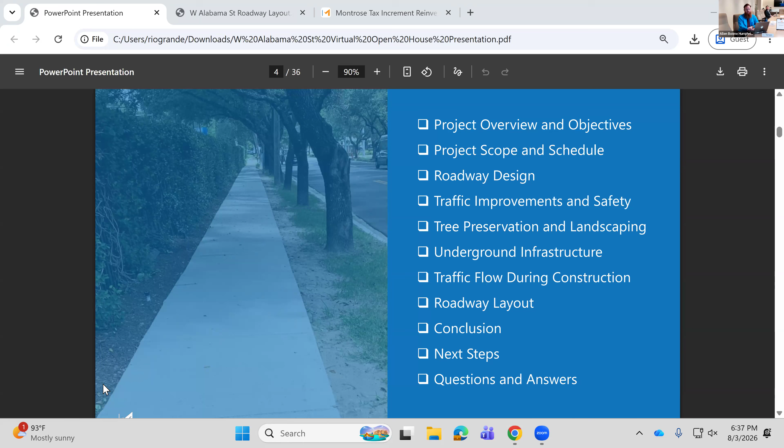These professionals can answer questions that you submit today during the Q&A session. Tonight we are going over the following topics: project overview and objectives, the project scope and schedule, the roadway design, traffic improvements and safety, tree preservation and landscaping, underground infrastructure, traffic flow during construction, the roadway layouts, with a conclusion, next steps, and questions and answers.

First, we are going over the project overview and objectives. Now, this project from Shepherd to Spur 527 is the middle section of a larger project.

The key goal for the City of Houston was to have consistency between all three sections. The City of Houston drove major decisions such as lane configuration and key safety design choices on all three projects for consistency. Now we are the middle segment, and so to the west is the Upper Kirby segment of West Alabama, and you can go to the Upper Kirby website for information about their project. To the east of us is the Midtown section of the West Alabama project.

The West Alabama Street project is a full roadway reconstruction project that is 1.6 miles long. The construction cost will be approximately $30 million. It is currently in the design phase.

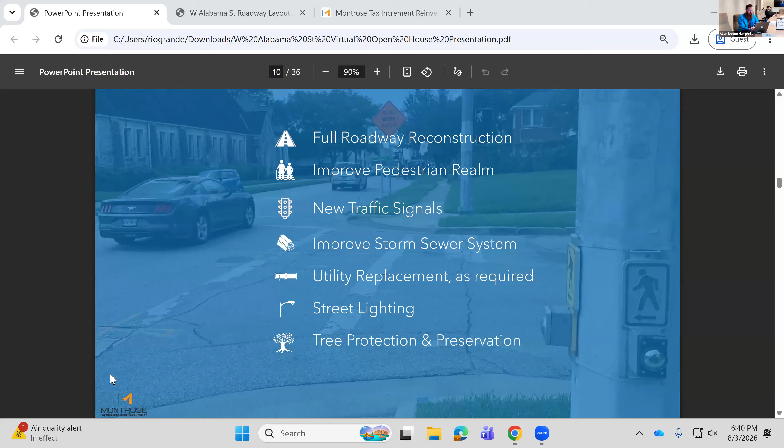The project schedule for West Alabama Street is currently in the design phase, which will continue through late 2026, with construction beginning in early 2027, lasting approximately 2 years to completion in early 2029. Just be aware that this timeline is subject to change.

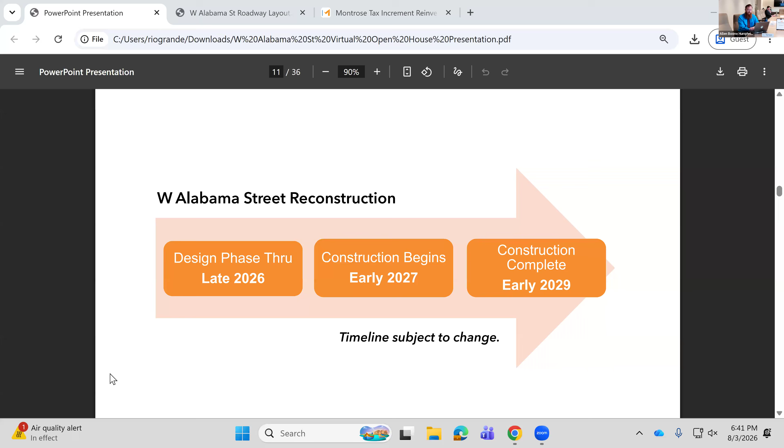Now for the roadway design, let's compare existing to proposed conditions. Existing conditions, shown in the photograph at top left, consist of poor to satisfactory asphalt pavement, one lane in each direction, with a poorly marked center two-way left turn lane. This lane used to accommodate the former contraflow lane, and today, now that it's no longer a contraflow lane, it operates more like a two-way left turn lane without the proper markings.

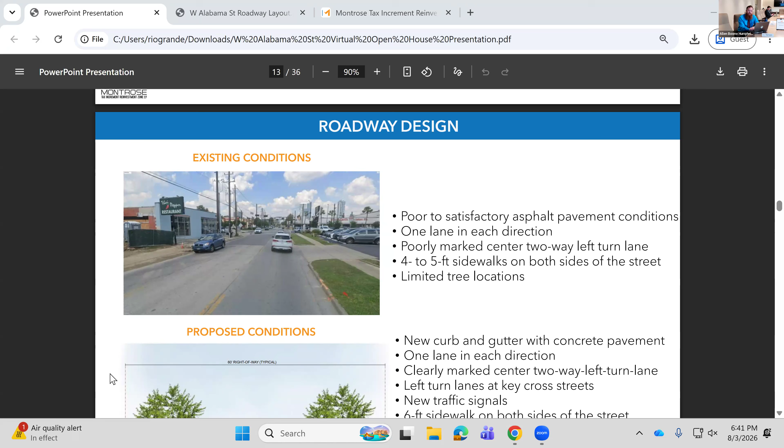The sidewalks are 4 to 5 feet in width on both sides of the street, and tree locations along the roadway are fairly limited. Several of the blocks have no trees at all.

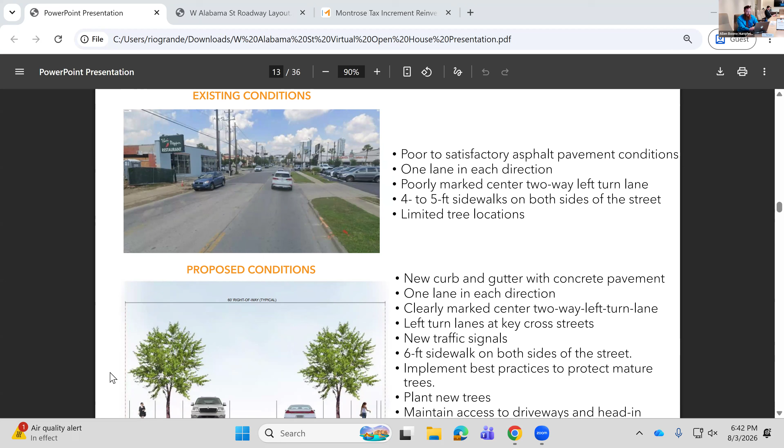Proposed conditions will have a new curb and gutter with concrete pavement roadway, one lane in each direction, a clearly marked center two-way left turn lane, left turn lanes at key cross streets, new traffic signals, and 6-foot sidewalks on both sides of the street, as shown in the typical section at bottom left.

Throughout the project, we will be implementing best practices to protect mature trees. New trees will be planted where possible, and we will maintain access to driveways and head-in parking.

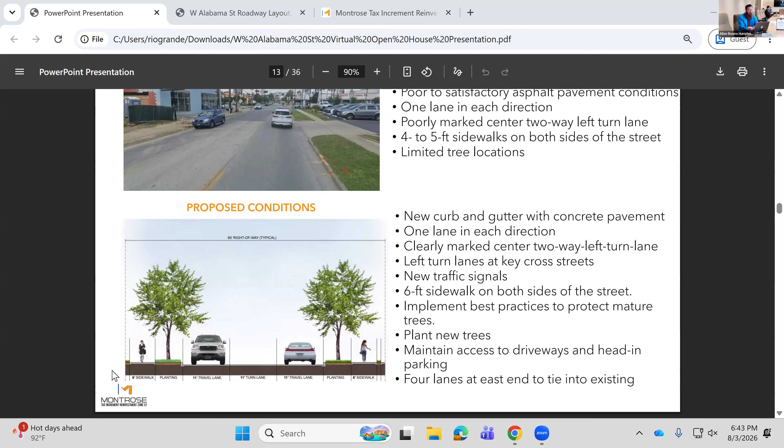One section of the project, in both existing and proposed conditions, does have 4 lanes, at the very eastern end near Spur 527. Overall, the existing lane size is closer to 12 feet, whereas our proposed lane size is 11 feet.

Now for traffic improvements and safety, the traffic signal improvements consist of 6 reconstructed traffic signals and 1 new traffic signal at Hazard Street.

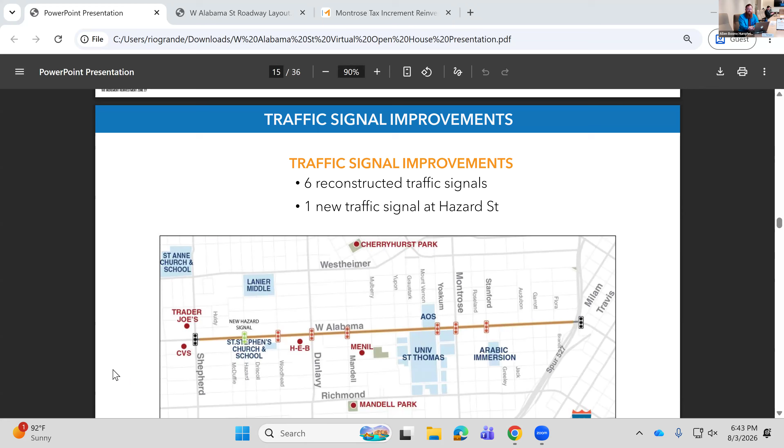If you look at the image below, there's a legend at the bottom right of the map. The red traffic signals represent the signals being reconstructed, at Woodhead, Dunlavy, Mandell, Yoakum, Montrose, and Stanford. There's a new traffic signal at Hazard Street towards the western end of the project, and the two signals at the westernmost and easternmost parts of the project, at Shepherd and Milam, will remain.

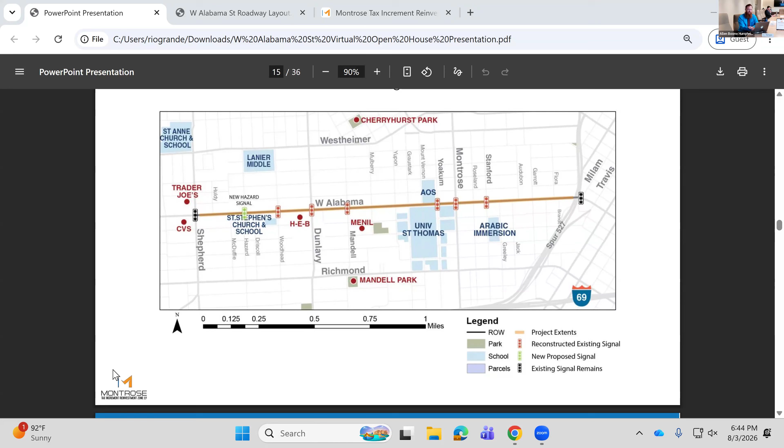Now I'd like to talk a little about intersection safety for pedestrians. At these signalized intersections, there are pedestrian signals, as you can see at the top left, and audible pedestrian signals for those with impaired vision. No right turn on red signs will be posted at all signalized intersections to enhance safety within the intersection.

Lastly, leading pedestrian intervals are being recommended to the City of Houston at all signalized intersections. The Federal Highway Administration notes safety benefits of a 13% reduction in pedestrian-vehicle crashes at intersections with leading pedestrian intervals. We recently did this on Montrose Boulevard, and we will be working with the City of Houston for these to be approved on West Alabama Street also.

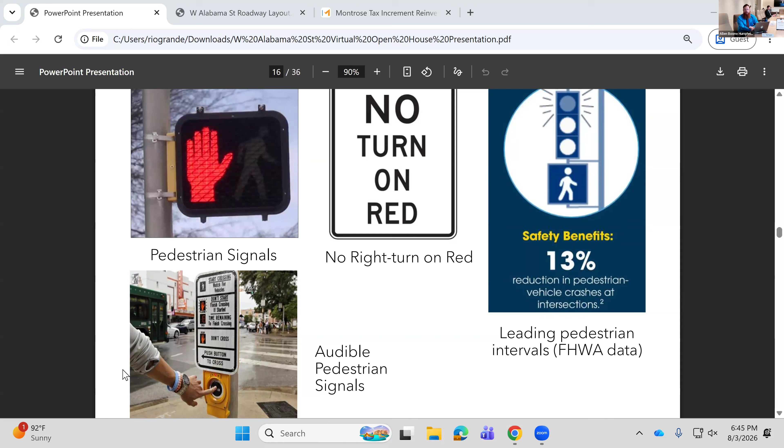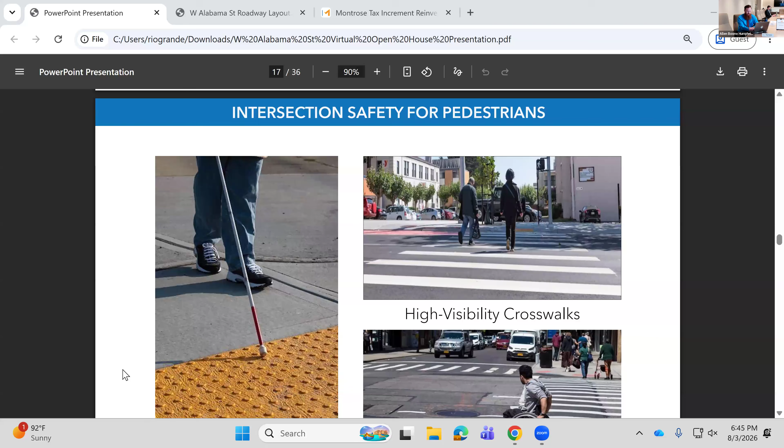Also at intersections, there are high visibility crosswalks, truncated dome warning devices for those with vision impairments, and wheelchair ramps. These are all critical safety improvements at intersections.

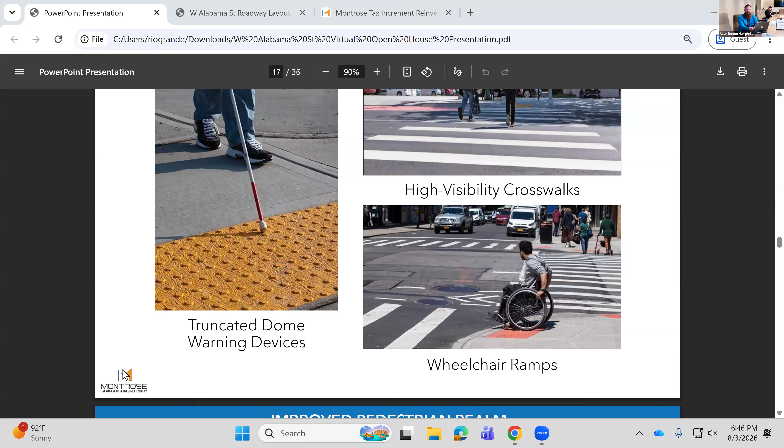Now for an improved pedestrian realm, we're going to compare and contrast the existing with the proposed as we go down this list. In existing conditions, there are 4-foot wide, poor condition or broken sidewalks. In proposed conditions, we are upgrading those by removing the existing sidewalks and replacing them with 6-foot sidewalks where possible.

In existing conditions, there is outdated pedestrian signal infrastructure, whereas in proposed conditions, we are upgrading pedestrian signal infrastructure to city standards. In existing conditions, there are faded or missing crosswalk pavement markings. In proposed conditions, new high visibility crosswalk pavement markings will be installed.

In existing conditions, there are at times inadequate wheelchair ramps. Sometimes they're just too steep. In proposed conditions, we are installing ADA compliant wheelchair ramps.

In existing conditions, there are several sections of the project where safe crossings are too far apart compared to the standard crossing spacing that the City of Houston prescribes, between 500 and 700 feet. In our proposed conditions, we are upgrading the spacing of the crossings to achieve approximately that 500 to 700 foot spacing.

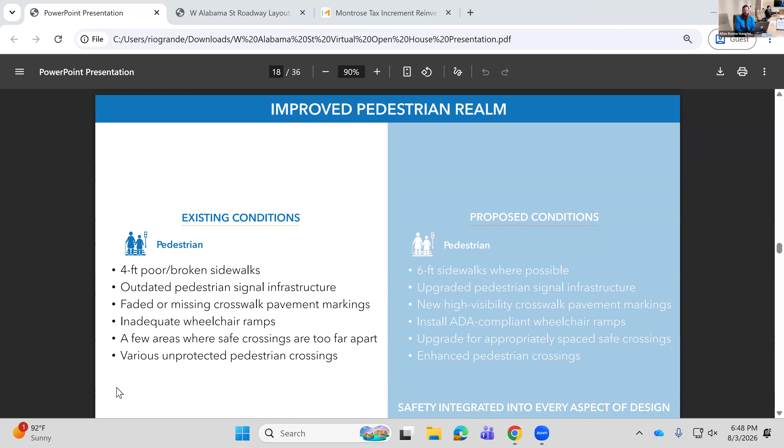Now, when we're designing this pedestrian realm, we are integrating safety into every aspect of our design. That is by far the most important part of this project: to keep all roadway users safe.

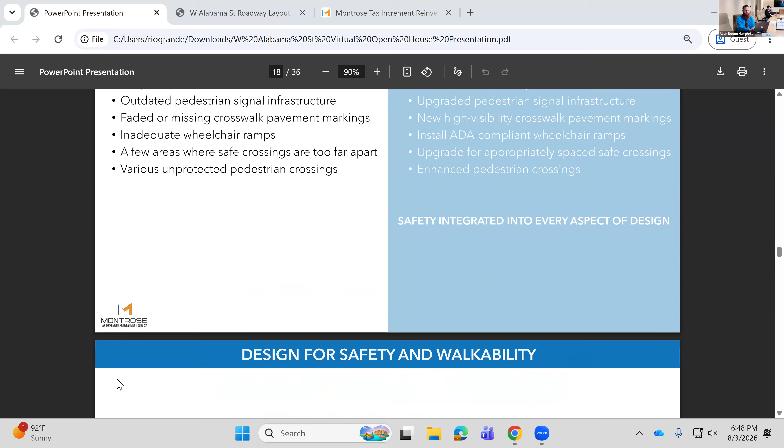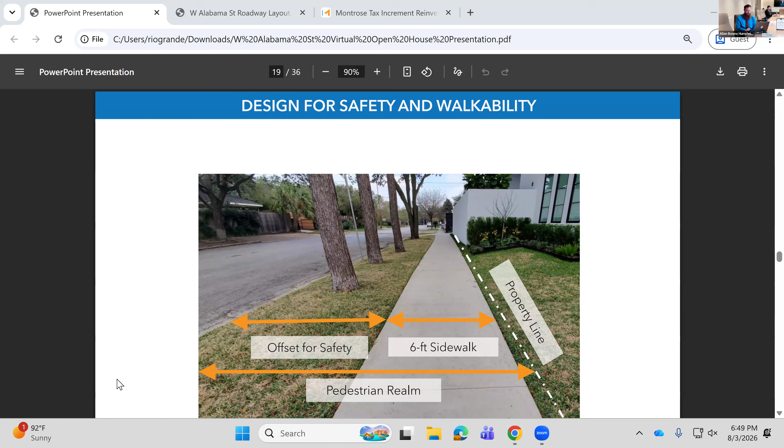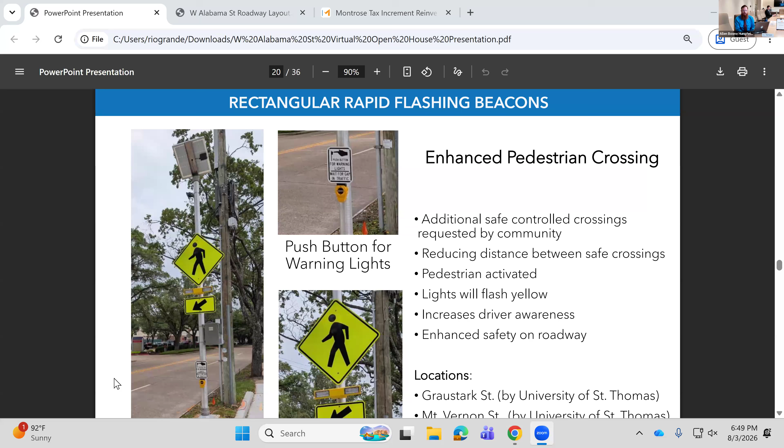Now, back to those enhanced pedestrian crossings. What we are designing on the project as an enhanced crossing is called a rectangular rapid flashing beacon. These additional safe controlled crossings were requested by the community. We've heard at many meetings how people feel unsafe crossing the roadway, and in discussions with the City of Houston, we came up with this improvement, which reduces the distance between safe crossings.

The way it works, if you can see on the left here, there's the image of a rectangular rapid flashing beacon. You have the pedestrian sign, and below that are two flashing yellow lights, below which is the diagonal down arrow, and then the push button. So when a pedestrian wants to cross the road, he should push the button, which starts the warning lights flashing yellow.

As they flash yellow, it brings an increased driver awareness to the presence of the crossing. Once the pedestrian has identified that it is safe to cross, the pedestrian should cross the road on the high visibility crosswalks to the other side. Now, all of this has been proven as an FHWA safety countermeasure for crossing a street.

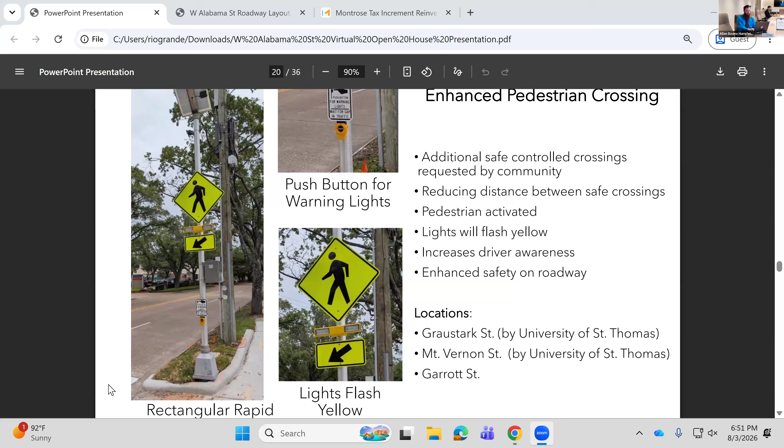Next, now for tree preservation and landscaping. Our design will preserve trees to the maximum extent feasible. To do this, we use a variety of best practices to protect the trees, which can be seen throughout this slide. In some instances, we have zero curb cutback, seen on the top right, where the ground near trees won't be cut behind the back of the existing curb.

Now, in a roadway where everything is shrinking down a little bit, the existing roadway is 35 feet from face of curb to face of curb, whereas the proposed roadway with 3 11-foot lanes is only 33 feet from face of curb to face of curb. Zero curb cutback will be implemented where appropriate and where mature trees exist that are being preserved.

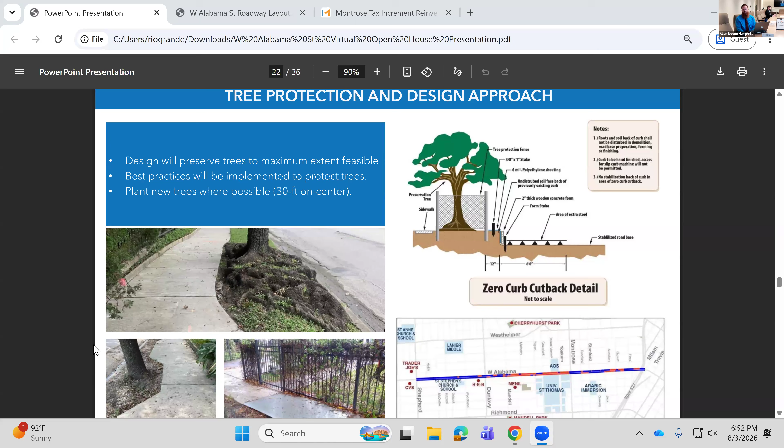Now, in the bottom left, you can see at times where tree protection is designed through the placement of the sidewalk. As you can see with the large roots for this tree in that top image, the sidewalk is not getting any closer to the tree than the existing sidewalk was before it was removed. Also, at times, we can have our full 6 feet of width for the sidewalk getting up close to the tree and then narrow down to 4 feet or 5 feet of width as needed to get past the tree while preserving it.

The third best management practice is the use of a checker plate across uneven root systems. Now, if you look at the bottom right, you'll see an image of a roadway map, and you see both a blue and a reddish orange line.

The blue represents areas where no mature trees are present between the sidewalk and the curb, and this is the predominant condition along the roadway. Whereas the reddish orange line shows the presence of mature trees, which is more closely concentrated around the center of the project. In those red areas, we are designing the preservation of trees to the maximum extent feasible. Whereas in the blue areas, we will be planting new trees where possible at 30 feet on center.

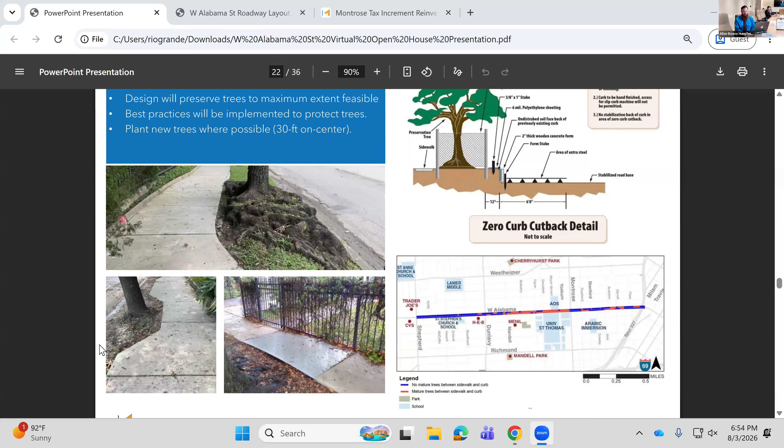An additional tree preservation method has to do with underground infrastructure installation. The traditional repair method involves excavating a trench to install the storm sewer, but with the presence of trees, a trenchless repair method is being utilized to construct water lines. For example, water lines can be bored underneath trees without damaging the root systems, thereby preserving the tree.

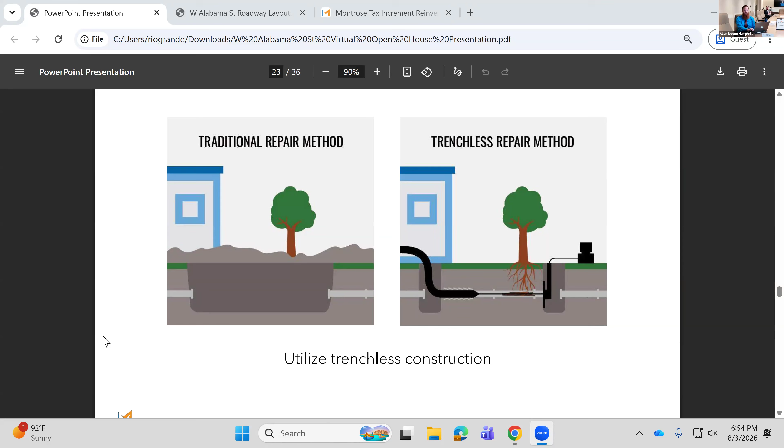Our landscape architect has selected a variety of different types of trees to be planted along the roadway, including a live oak, cedar elm, Drake elm, as well as St. Augustine grass.

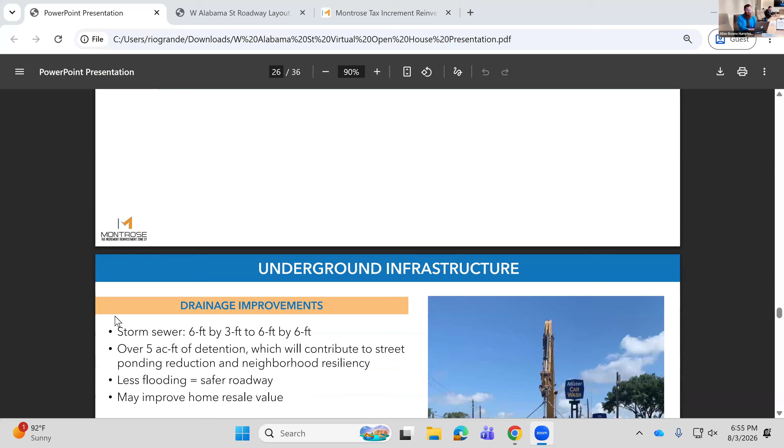The underground infrastructure consists of both drainage, water line, and sanitary sewer improvements. For the drainage, it consists of a storm sewer ranging up to 6x3 to 6x6 box culverts under the roadway. Together, throughout the 1.6 mile corridor, this provides over 5 acre-feet of detention, which will contribute to street ponding reduction and an increase in neighborhood resiliency.

What you'll see after construction is less flooding on the roadway. With less flooding on the roadway, that is a safety improvement for people, whether they're driving in their car or they're walking across the street. It also may improve home resale value.

With water line and sanitary sewer improvements, some of these sanitary sewers and water lines are going to be relocated because we're putting a large storm sewer in conflict with them, so they have to get shifted to somewhere else under the road. But some of them are old, or they're a material that needs to be upgraded to something approved by the city.

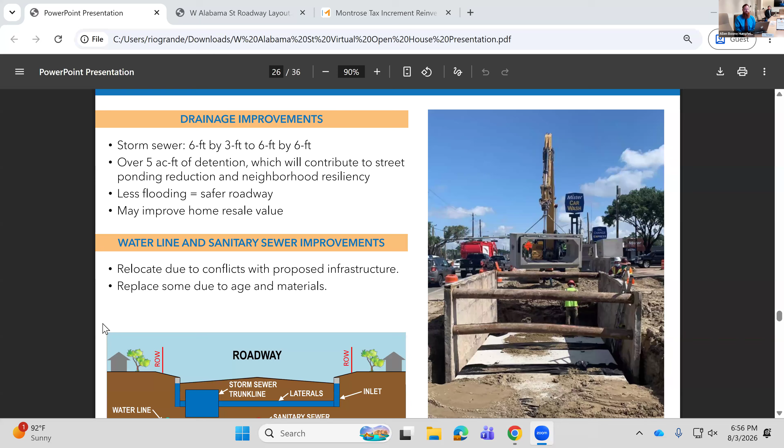Present on this slide, you can see a large storm sewer on the right that is about the same size as what we're installing. It looks closer to the 6x3 size. Whereas on the bottom left of the screen, you can see a cross section under the roadway, where you can see the water line and the sanitary and how they're offset from our proposed storm sewer trunk line and pipes.

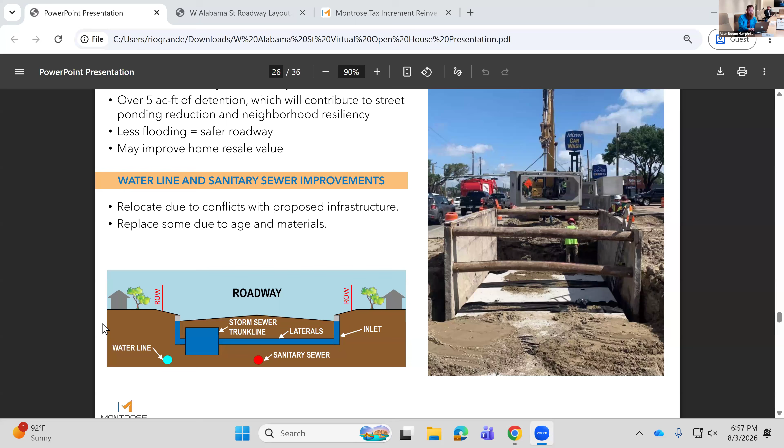Now, with traffic flow during construction, we are going to construct one lane at a time. First is the northern lane, then the middle, then the southern lane. Signage, pavement markings, and traffic devices will direct drivers, with various traffic control devices such as drums and barriers by excavation. All of this is designed to ensure optimal safety on the roadway.

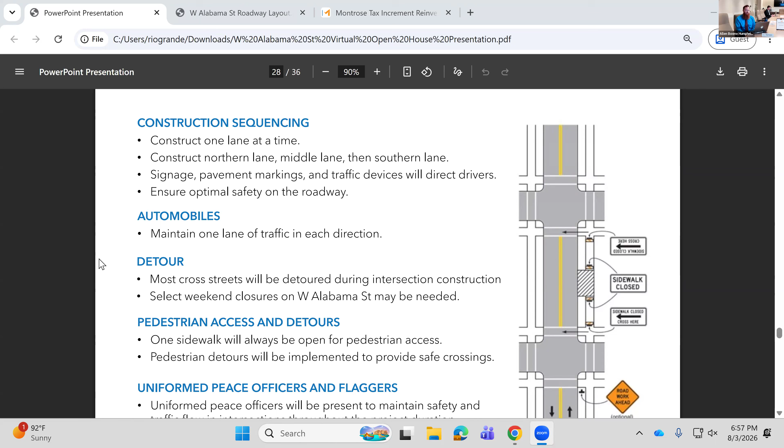For automobiles, one lane will be maintained in each direction, with most of the cross streets being detoured during intersection construction. Select weekend closures on West Alabama Street may be needed at various times.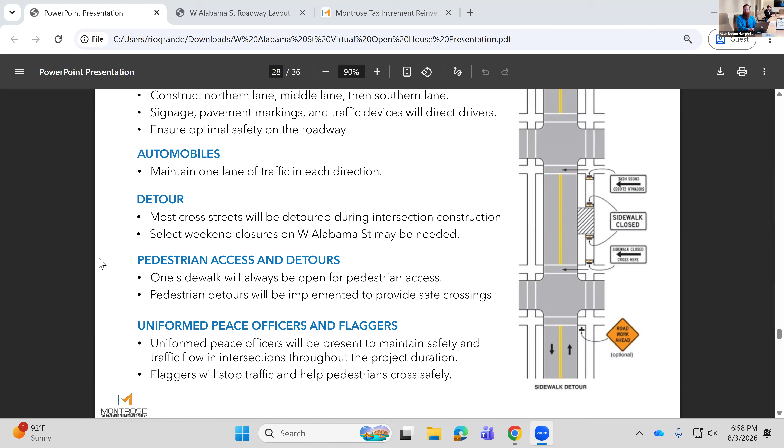For pedestrians, one sidewalk will be open for pedestrian access, while pedestrian detours will be implemented to provide safe crossings, such as you can see on the right side. Within a given block during construction, pedestrians will be helped to cross the road at either intersection. Uniformed peace officers will be present to maintain safety and traffic flow in intersections throughout the project duration, while flaggers will stop traffic and help pedestrians cross safely.

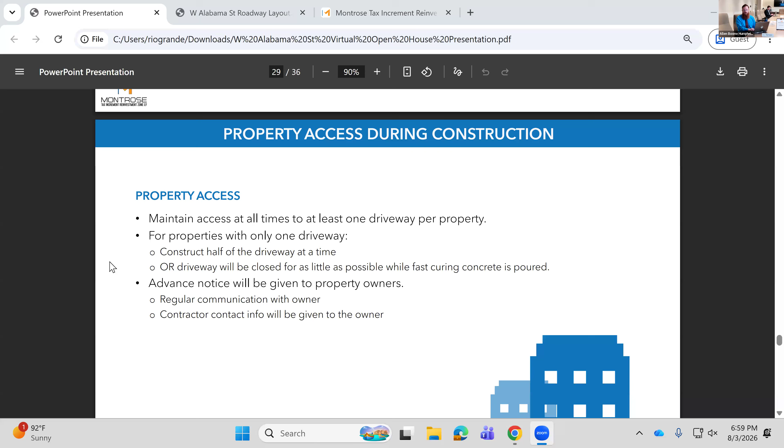Now, property access during construction: we will maintain access at all times to at least one driveway per property. There are properties with only one driveway, and these driveways can be constructed half at a time if they're wide enough, or the driveway will be closed for as little as possible while fast curing concrete is poured. Advance notice will be given before their driveway is closed, with regular communication with the owner. All contractor info will be given to the owner in case they need to be contacted.

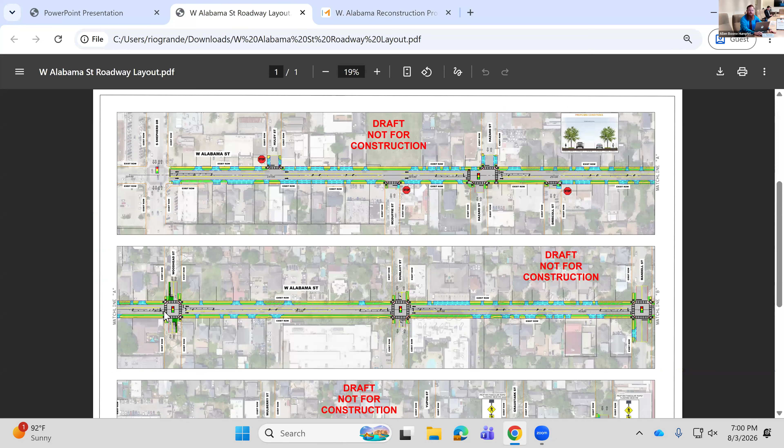Now I want to show you all the roadway layouts, and where you can find it on the website. On the website, montrosehtx.org, if you go to projects, West Alabama Street Reconstruction, you can scroll down, and below the meeting information, you have the presentation and the roadway schematic. This is also where you can submit your comments and questions. Now, first, I'd like to show the legend.

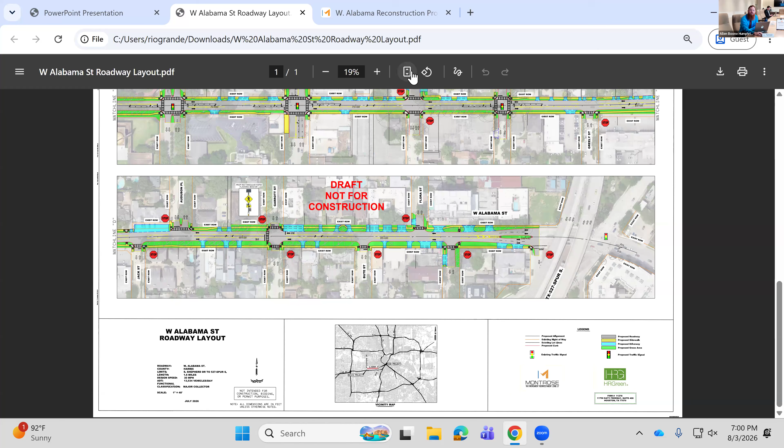In the bottom right, you can see what all the colors mean. Gray is proposed roadway, yellow is sidewalks, blue is driveway, and green are grassy areas, as well as signals, curbs, etc.

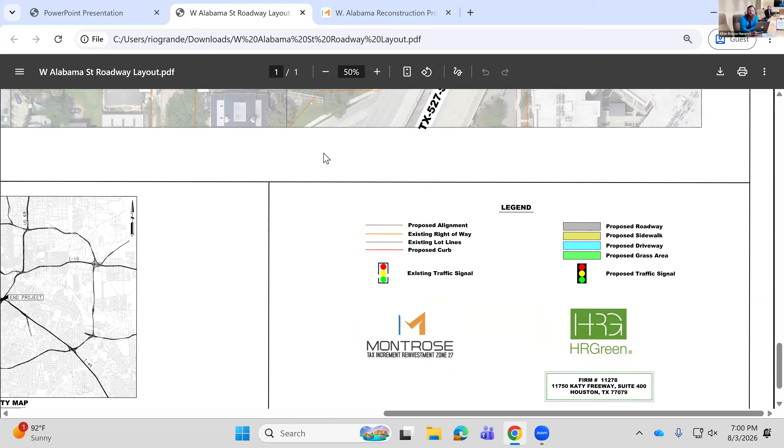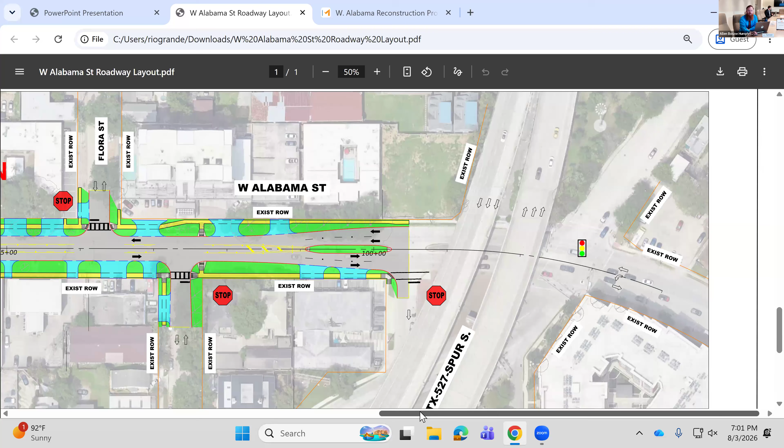I'm just going to go over a sampling of the roadway schematic to make everyone a little bit familiar with it. Here we're on the eastern end of the project where we have the 4-lane section, which transitions to the 3-lane section with 1 lane in each direction and the 2-way left turn lane.

You can see examples of how sidewalks are being routed around existing trees to preserve them, as well as areas where there are wider green areas, such as this wider right-of-way towards the eastern end of the project near Bute.

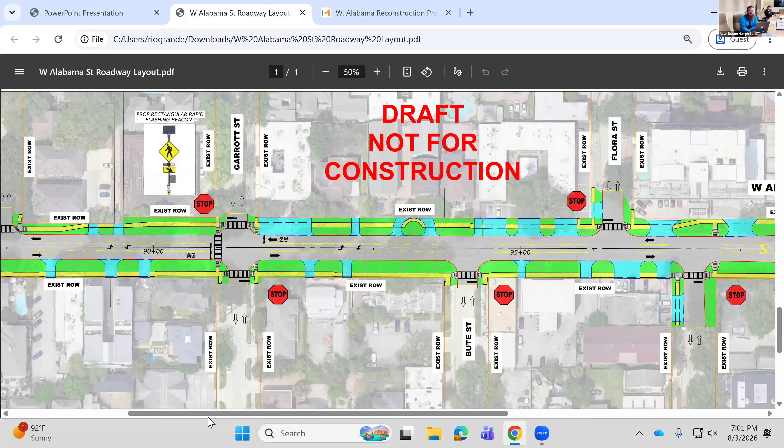Here is Garrott Street, where one of the rectangular rapid flashing beacons is located on the western side of the intersection. You can also see where the right-of-way width gets a little bit smaller and where it's a little bit wider.

Now, going a little bit further to the west, you can see areas where we have the existing trees and how we're preserving them, the left turn lanes at signalized intersections, and driveways.

If a person is interested in their driveway configuration, we are in general maintaining the width of driveways and are looking for opportunities to shorten the crossing distance on driveways for pedestrians where possible.

Mulberry is a good example of a street that has high visibility crosswalks going across Mulberry, but not across Alabama. So this is an example of where you would be encouraged to go to the next street over to the west for a safe crossing location, for example, at the signalized intersection at Mandell Street.

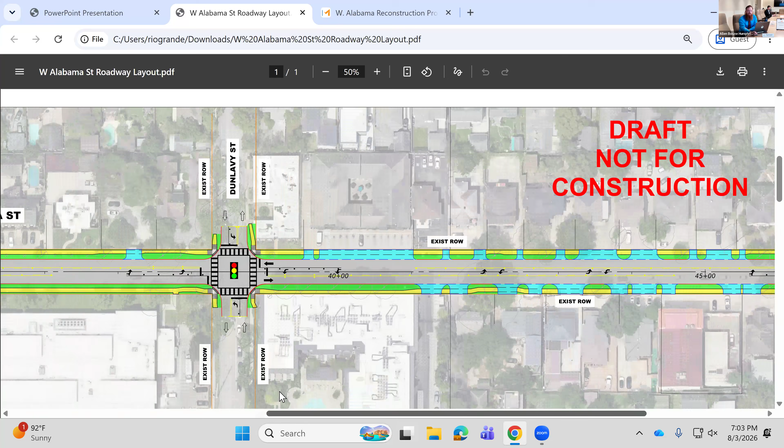Going further to the west, you can see the Woodhead intersection where the existing lane configuration is being matched.

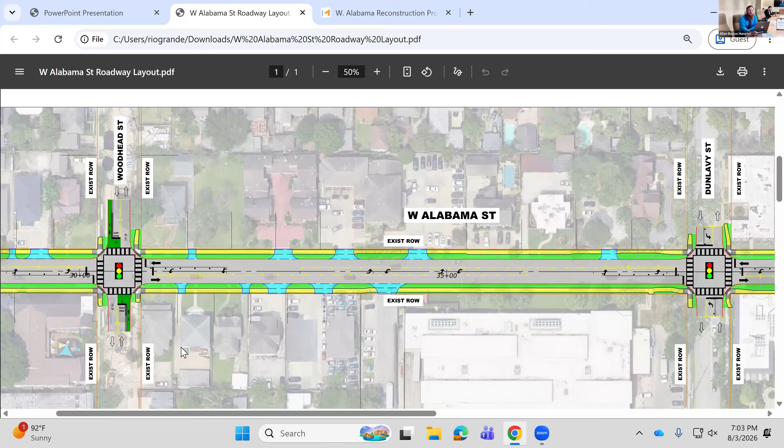Also of note at Shepherd, formally left turns were prohibited, but even in the existing conditions today, left turns are allowed. So we are matching that lane configuration to continue to allow those left turns onto Shepherd.

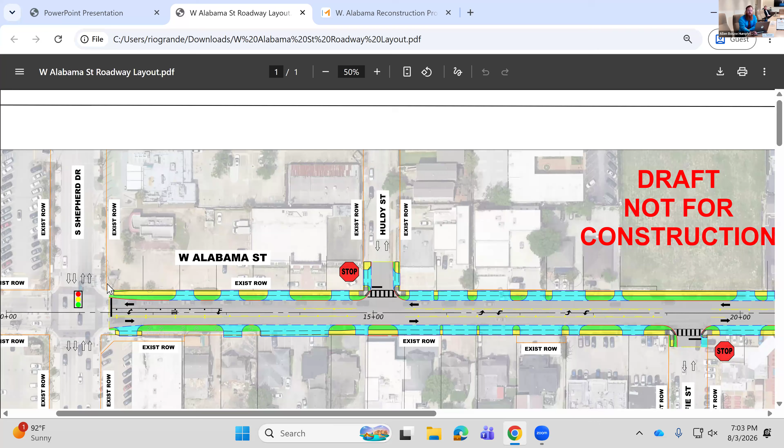Lastly, we have Hazard Street. You can notice how, when approaching the intersection from both sides, the existing right-of-way has a bit of an offset. That offset is being maintained without any right-of-way acquisition, but the intersection is being designed for more optimal safety and much needed safety improvements.

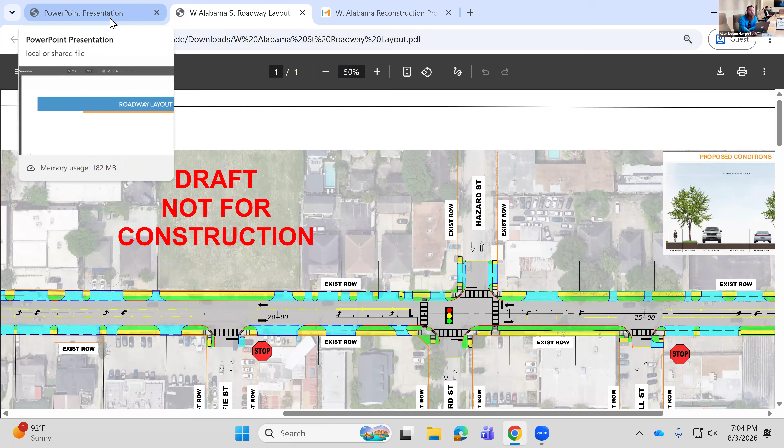Now, to conclude, after the roadway is reconstructed, all of our project objectives will have been met, which include improved safety and mobility for all users, improved drainage, and promoting a pedestrian-friendly environment while preserving trees to the maximum extent feasible.

Now, next steps from here: we have our schedule, with design going through late 2026 and construction lasting 2 years starting early next year.

The public commentary period is open until August 17th. You can submit your comments and questions through a form on montrosehtx.org or email info@montrosehtx.org. Again, go to the website for this presentation and the roadway layout.

Now we are going to enter into the comments period. There were a number of comments submitted in advance of the meeting that we will be responding to, after which questions submitted during the meeting—the project consultants are working on some answers to those, which will be shared after the initial questions are answered.